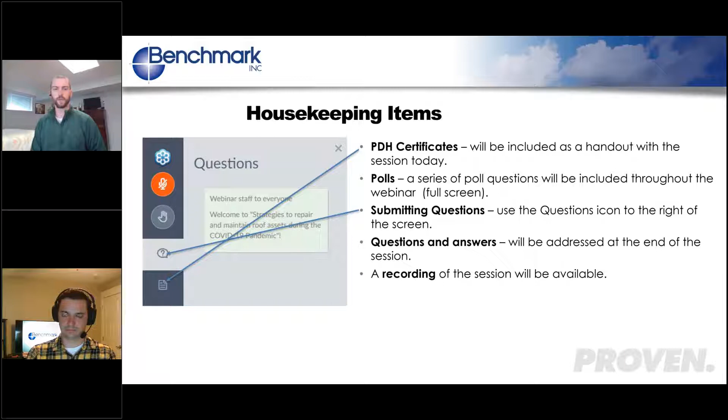First, I want to introduce my partner in this presentation today. Andrew Reynolds is a partner with Benchmark. He's been in the roofing industry for 10 years. He is a senior consultant and a licensed engineer from Iowa State, Go Cyclones. His contact information is available on the screen if you have any questions for him after this presentation.

My name is Ben Fiedler. I'm a staff consultant with Benchmark. I've been here for 5 years, and I am a registered roof observer. Once again, there is my contact information.

A little bit about Benchmark real quick. We are a roof and pavement design company. We are independent, privately owned. We have no special interest with manufacturers or contractors. We really want to look out for our clients' best interests. We have two offices, one in Cedar Rapids, Iowa, and the other in Waukesha, Wisconsin, as well as consultants based throughout the United States out of their home offices.

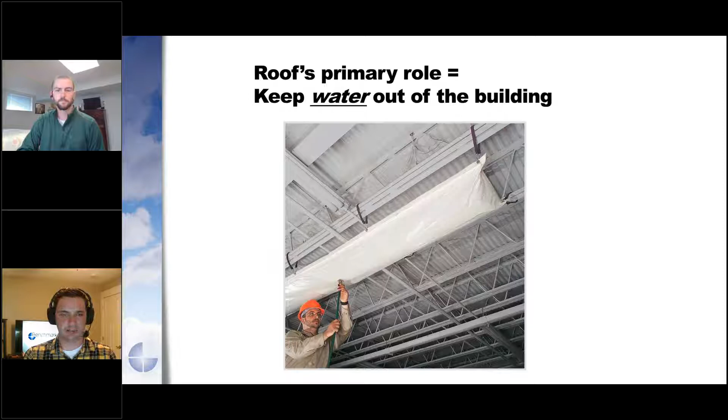Yeah, so inherently, the role of a roof is pretty simple: try to keep water out of the building. While it's somewhat simple to put on a roof that's watertight, it can be difficult to make that roof sustainable and long-lasting. There are a lot of different variables we're going to talk about today that you have to think about when looking at either putting on a roof for new construction or re-roofing.

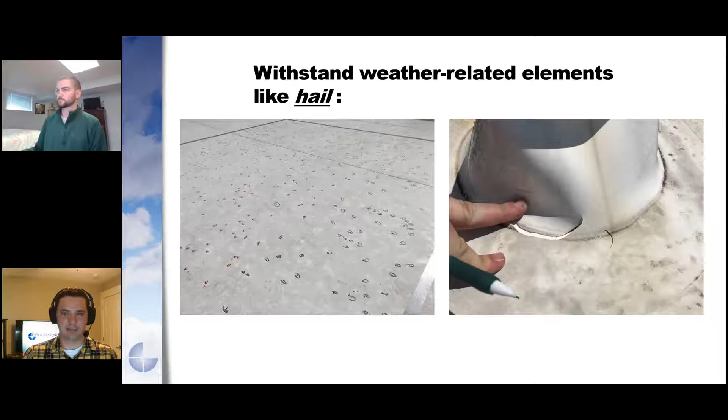One of those weather-related elements is hail. Hail is a big topic right now in our industry. It's kind of an ever-moving target on how to design for it and what materials to use and when to use them. So it's a moving target, but we think we're getting there with it.

Another one that's very project-specific is wind. You really need to know your situation with this. There's a ton of different variables that compound on each other to come up with a proper wind design and wind uplift pressures. I'm going to go into this in a lot more detail later, but the important thing is you really need to have a design professional do these uplift calculations, even section by section, because scenarios change even if roofs are right next to each other.

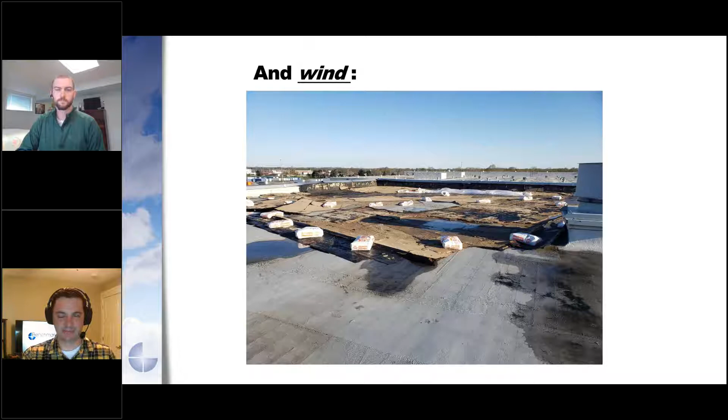And there was a small fire that started in one side of the plant. It got up into the roof. It was all applied in asphalt. Pretty much there's tons and tons of liquid asphalt coming into the building, caught everything on fire. It was a total loss.

This changed a lot of things in the construction industry, including firewalls. And it also triggered things like no more roofs being installed with asphalt directly to decking. So it was a big event, about 1.5 million square foot loss, sparked a lot of things in insurance for insurance requirements as well. So it's definitely something that we look at every single project we do.

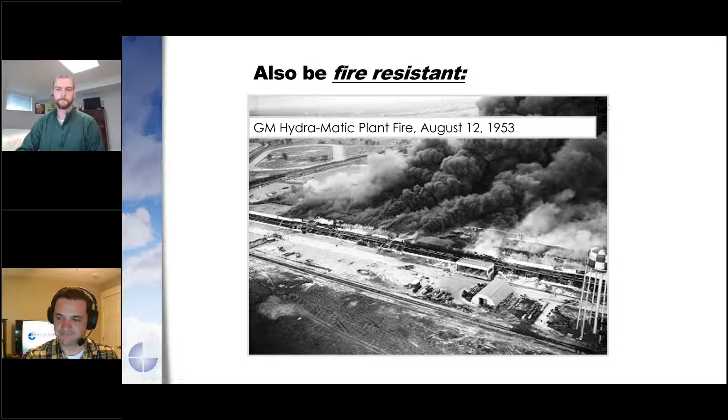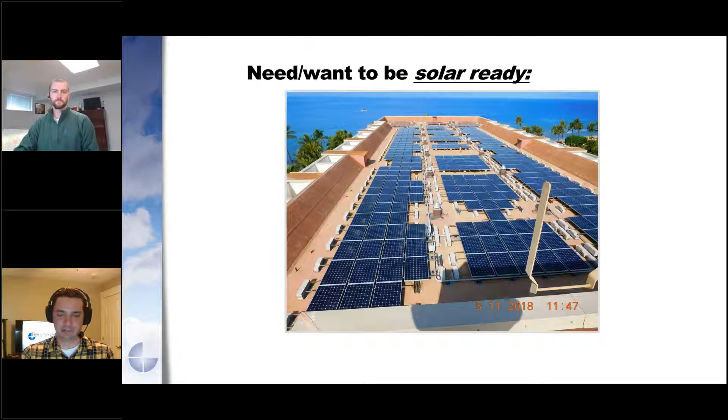You're going to have an electrical engineer. You're going to have a structural engineer, and you're going to have those parties talking early.

And the need or want to be green roof ready. I'm going to touch on this later, so I'm not going to spend a lot of time on it now. So I'm going to kick it over to Ben, and he's going to talk about the roof design process.

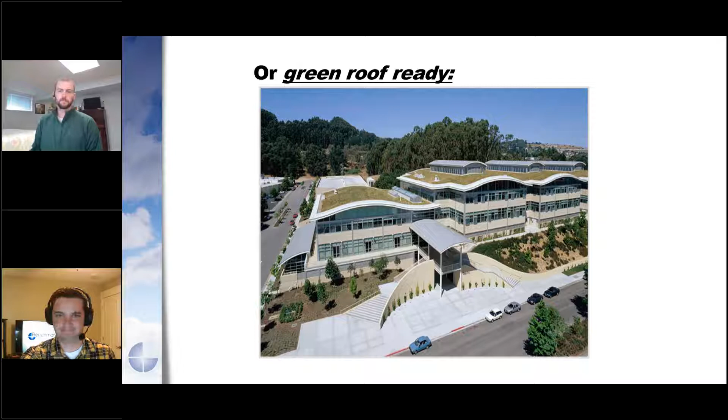The first thing we want to touch on is trade associations, so that would be NRCA, ERA, Asphalt Roofing. All these trade organizations try to develop standards that help guide best practices in the industry. For example, SPRI has developed a lot of really high level edge metal standards as well as gutter standards.

The next thing we want to think about is insurance requirements. So many facilities are Factory Mutual or other large carriers, and they have a lot of their own requirements, and they set a lot of standards as well.

The next thing we need to think about is your local municipal government level restrictions and standards, such as Miami-Dade in the Florida area. They have a lot of hurricanes in that area, and so they have a lot of standards that help reduce the risk during hurricanes. And the last thing we want to think about is building codes.

And building codes actually often adopt insurance company and trade association standards and codify them. So for example, SPRI's ES-1 edge metal calculation is codified, as well as a lot of Underwriters Laboratories standards.

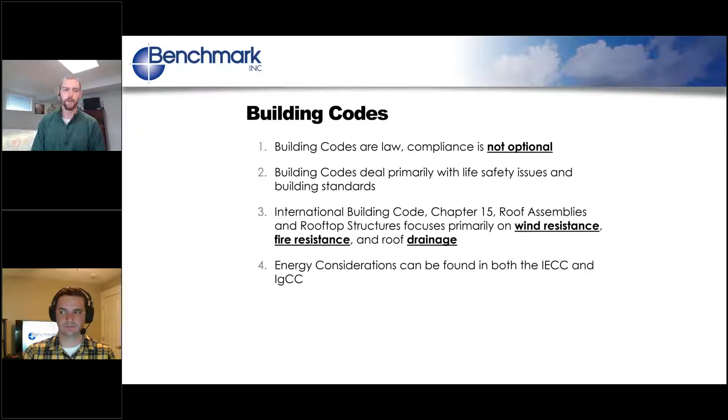Energy efficiency in a building is impacted by the International Building Code, the Energy Conservation Code, and the Green Construction Code. Depending on which one of those is adopted, you have to check different places to see what your insulation requirements are. With that, we're going to switch over and start talking about wind uplift.

Within the code, you won't actually find anything on how to calculate wind uplift. It references you to a publication called ASCE 7. There are different versions - 705, 710, 716 - those are just release dates that different codes reference. For instance, the 2018 code references ASCE 716.

On top of that, you also get internal pressures. If you have overhead doors, windows, or regular access doors, when wind hits those there's some leakage. So on a strong wind event, if you have a loading dock with a large overhead door, you'll get air leakage, or if that door's open, air gets inside and pushes up on the roof deck. It compounds - you've got wind on top sucking the roof off, and wind inside pushing up. That's usually when we see failures.

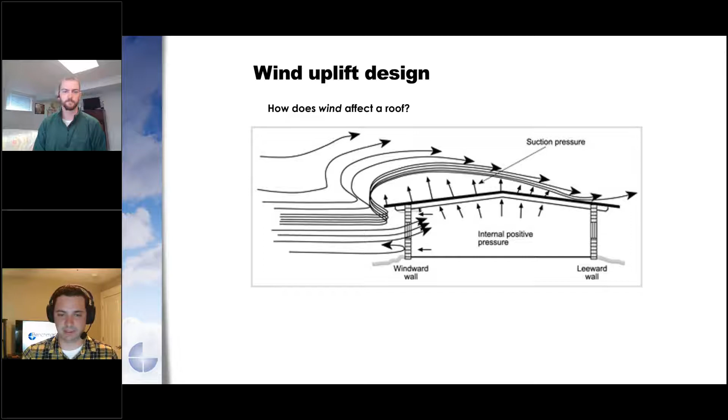You determine your uplift loads per ASCE 7, and we'll also touch on FM Global more - their name's going to pop up quite a bit through this presentation. They have their own calculator based off of ASCE 7, but there are subtle nuances that usually result in higher uplift pressures when you use FM Global's calculator.

Some things you'll need: building height and width - on older codes, those are used to determine your perimeter and corner zones. Design wind speed, which varies depending on where your project's located. Parapet height - if you have a parapet above 3 feet tall, you can actually get some breaks when designing your wind uplift, especially in perimeters and corners.

Ground roughness touches on whether you're in an open field compared to a downtown area - there's a variable that changes, so you get a break if you have surrounding buildings that can block some wind. Occupancy category is a very important one - it's pretty much what's in your building. Is it a warehouse for finished goods, a hospital, or a warehouse over some sort of fuel storage?

Depending on what your building uses, it's going to change the requirements for your wind uplift. Roof slope will change things too, if you get high enough slopes it can change your perimeter and corner zones. Then there's enclosure classification, that's if your building is closed, partially enclosed, or open, and there's some calculations to do for that. Pretty much, if you have a building with a lot of openings on one side, the thinking is wind can get into those openings with no way out, so it goes up.

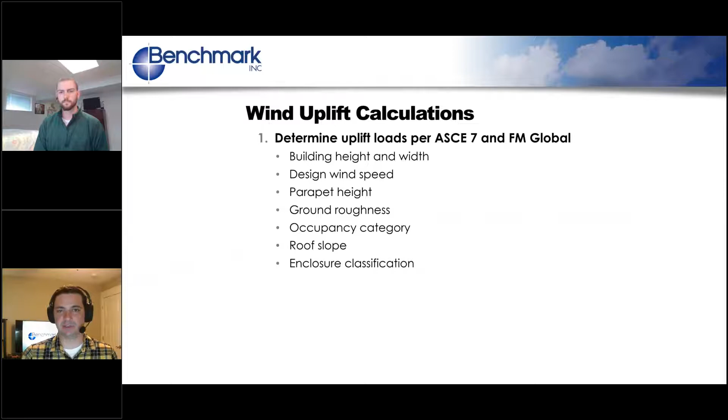So once you do all your wind uplift tests for each roof section, it's important to do it for each one because it will change as you go across, even on the same site, or if you have two roofs next to each other, they can change drastically. You need to pick a roof section or roof system that meets that.

So your research options are FM's Roof Nav, that's the big one, I'll touch on this a little bit later, but there's close to 1 million tested roof assemblies within Roof Nav's database. Miami-Dade uses some private testing laboratories and then reviews and accepts those roof systems. UL does a lot of testing with fire. The ICC has evaluation reports available for tested roof systems.

And then the newest one is SPRI's database for assemblies called DORA. That's slowly picking up, it's a free site to use. Manufacturers can submit their testing, DORA accepts it and puts it in their database. It's a really easy database to use. RoofNav can get a little tricky, so if you're having troubles, I'd recommend trying DORA.

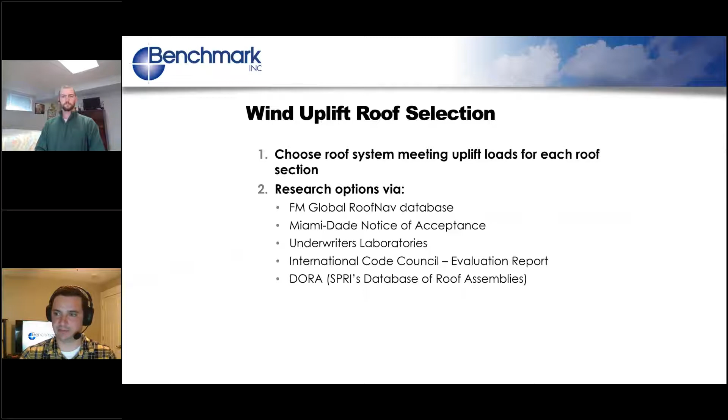So like I said earlier, you're usually going to see your losses happen at your perimeter and corner zones. The first line of defense on this is your nailer attachment and edge metal attachment. If you don't have those two kind of buttoned down, and you have a large wind event, you're more susceptible to having a loss.

For a nailer attachment, there's really not a whole lot in the code for that, so I'd recommend FM Global data sheet 1-49, which goes over nailer attachment for all sorts of different scenarios. You also want to make sure you have an edge metal system or coping cap designed to ANSI SPRI ES1 standards. That's in the code, that's a requirement. There are a lot of different ways to do that, you can have shop fabricated sheet metal tested to ES1, or pre-manufactured sheet metal systems from manufacturers that do their own testing and manufacturing. But it's really important to have a tested ES1 assembly.

There's also a gutter standard called GT1. It's not in the code yet, it's going in for adoption on the 2021 building code I believe, so that's going to become a new requirement. That's going to be interesting because there are some really, really bad gutter details that get installed, so it'll be interesting to see how that changes in the coming years.

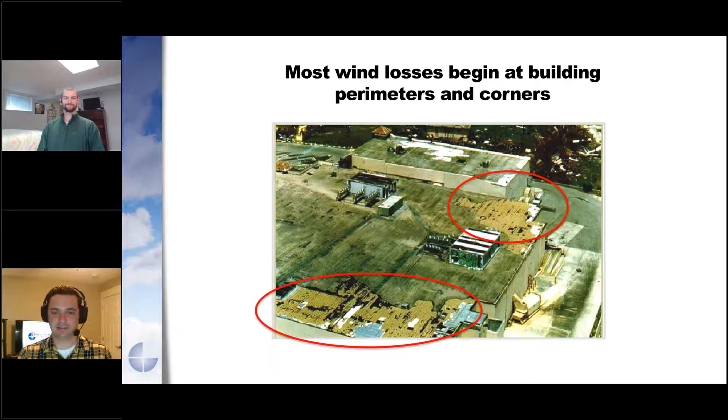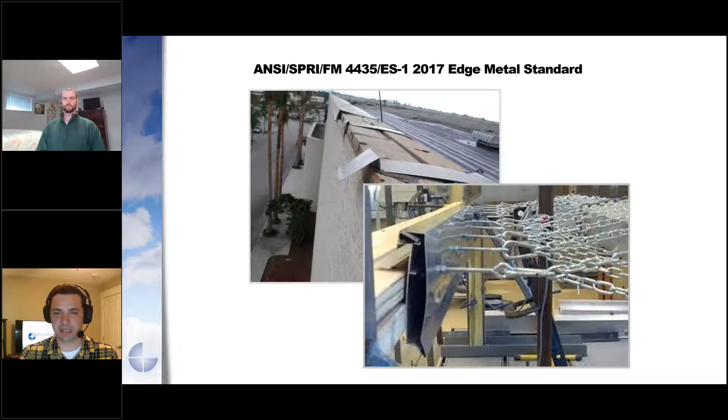Slope and drainage, I'm going to base this pretty much on the 2018 building code. For new construction, you're required to have a 1/4 inch per foot slope, whether that's structural or within a tapered system. Either one is fine, perfectly acceptable.

And then for each drain or scupper, you need to have an overflow device. So if you have a drain, if it's by a perimeter you can use a scupper, or you can use just a standard overflow drain. And then if you have a drainage scupper, you have to have an overflow scupper next to it.

For re-roofing, if you have a roof replacement or a recover of a low slope roof, you don't have to meet that 1/4 inch per foot standard, and you don't have to have overflow devices installed. You don't have to upgrade to meet code. So when you're talking about drainage, what you want to know is how does it slope, is it tapered or structural?

Can you improve drainage? If you're doing a recover and it's a tapered system, is there a way to install additional tapered insulation to take care of any problem areas? Is there enough drainage? If you notice your roof holds quite a bit of water during rain events, is there a way to add additional drains or scuppers? It can be expensive, but sometimes it's necessary, and it becomes a life safety issue, especially if you're holding a lot of water on your roof. You're more susceptible to collapses.

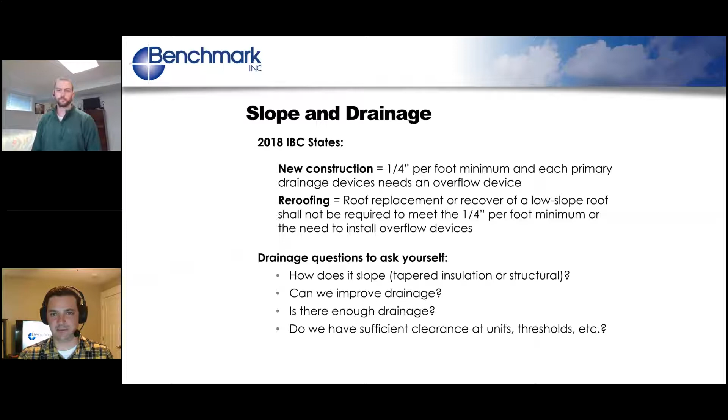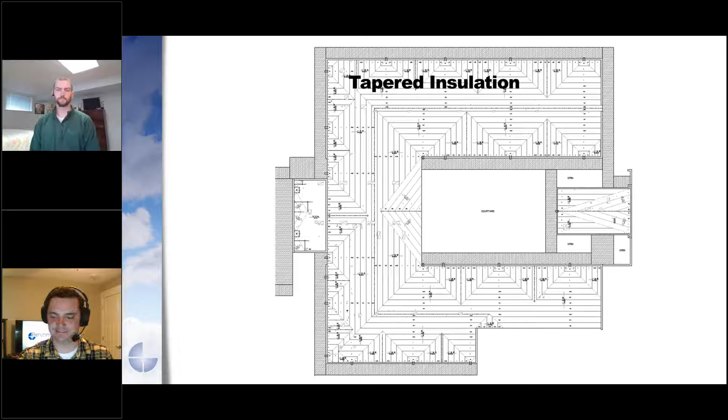So, environmental regulations. Once you've taken care of building code requirements, wind uplift, drainage, and stuff like that, you need to think about where your project is specifically located. The two big environmental regulations we run into right now are the South Coast Air Quality Management District, which focuses around the Los Angeles area with a few counties wrapped within that, and the Ozone Transport Commission, which covers the Northeast United States—think of the original 13 colonies. Those two districts restrict, to a certain extent, VOC content in roofing adhesives, primers, sealants, and a few other products.

So say your standard bonding adhesive for EPDM might have a VOC content of 500 grams per liter. They restrict it down to like 250 grams per liter, and I think South Coast might restrict it even further. So it really pushes you to change materials, especially adhesives. You're probably going to have to move to a water-based adhesive, which restricts your installation time because you obviously can't have it out when it's freezing. With solvent-based, you can actually get some variances to install in freezing temperatures.

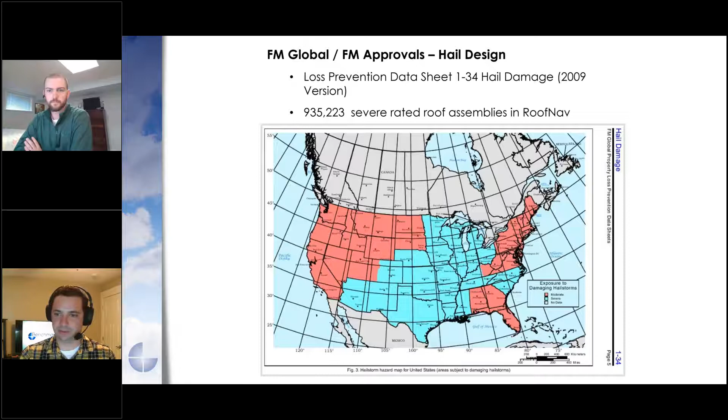As of yesterday, out of the 950-some thousand, 935,000 of those were rated for severe hail. So it was really easy to find roof assemblies within RoofNav. 98% of them were severe hail. So it really wasn't a huge issue until 2018.

Gave the guys up there a little break. But as of yesterday, there's only just over 4,100 very severe rated assemblies within RoofNav, which is just over 0.4%. So it's put quite the cramp.

If you're FM insured or you follow their policies within that centralized area, it is really difficult to find a roof assembly that is really acceptable. There are quite a few modified bitumen assemblies over a gypsum cover board, which is a pretty standard roof system and one that we specify quite often.

But if you want any sort of single ply roof system right now, almost all of them - I can't say for sure all of them - but PVC, TPO, EPDM, they do have assemblies available, but they use plywood or OSB as a cover board, which we do not recommend doing. If anyone's ever seen a slightly damp piece of plywood get baked out in the sun, it curls up like crazy. So we're not 100% sold on using those systems. It is driving a little bit of innovation in the industry, a little bit of change, but it is a difficulty right now.

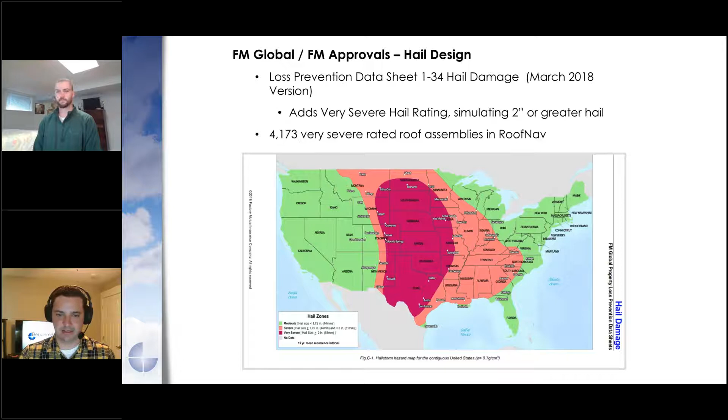All right, the next thing we're going to talk about is the occupancy considerations of your buildings. Recently we had a hailstorm that came through Cedar Rapids, and my sun porch roof ended up getting destroyed and needed to be replaced. So I had the roofing contractor install an adhered EPDM roof system. And for the first time, I knew what it was like to be in a building trying to work with a re-roofing project going on overhead. And the odor from the adhesive just completely filled my house.

Thankfully, we were able to open the windows and spend a little time outside to get away from the odor. You really need to be thinking about this, if you have office space directly below your roof section, a solvent-based adhesive is probably going to cause odor issues with the occupants. There are some things you can do to work around that, such as using water-based adhesives, which have a lower odor, or changing how your HVAC system vents.

The next thing you need to think about is the temperature of the interior space. Many food production facilities have blast freezers that reach minus 40 degrees, and they'll have a much different design than, let's say, an open canopy.

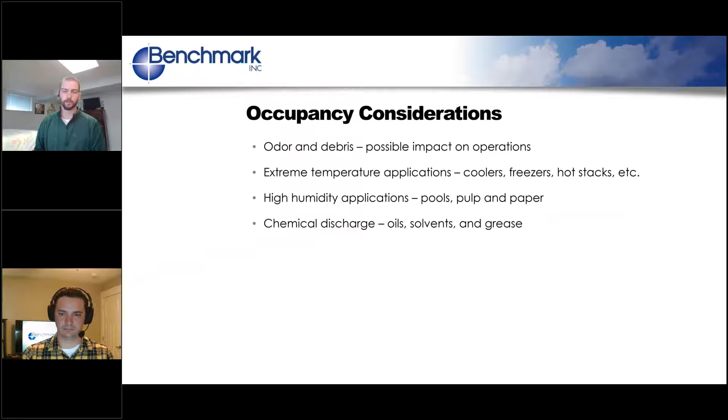So let's dive in a little deeper on odor avoidance. Asphalt is definitely on its way out as an adhesive. However, comparing asphalt to polyurethane adhesive, you definitely want to go with the polyurethane, because it has a significantly lower odor. We were talking earlier about VOC content, and one of the biggest misconceptions is that low VOC adhesives smell less. Actually, more often than not, they have a stronger odor than a full solvent, VOC-containing adhesive. So just be careful of using that as a control system.

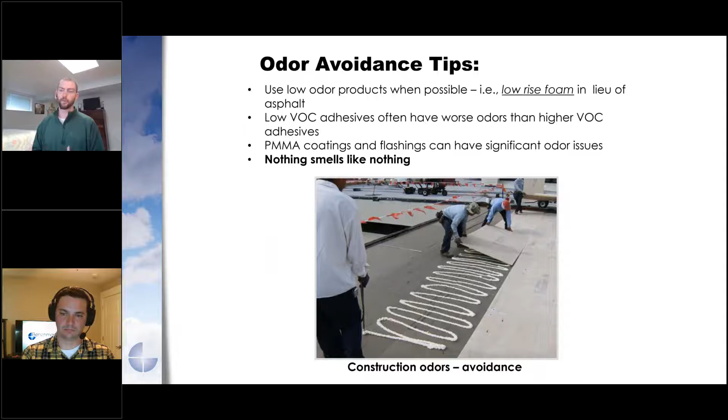PMMA coatings have some of the strongest odors in the roofing industry. Really just think about the fact that nothing really smells like nothing - every adhesive on the market has an odor to it. If you install a mechanically attached roof system, while you won't be adhering most of your field membrane, there will still be adhesives needed on flashings and things like that.

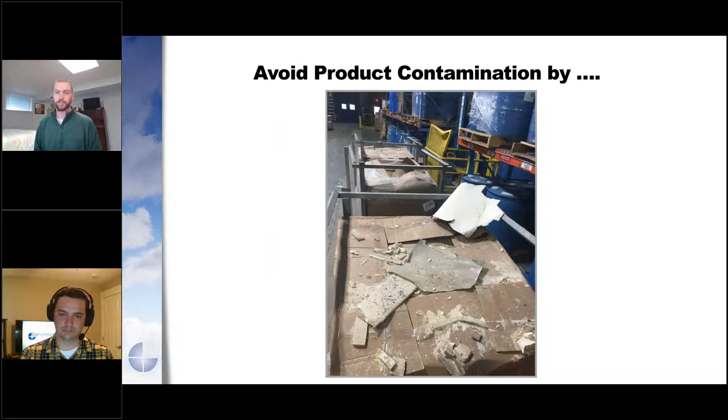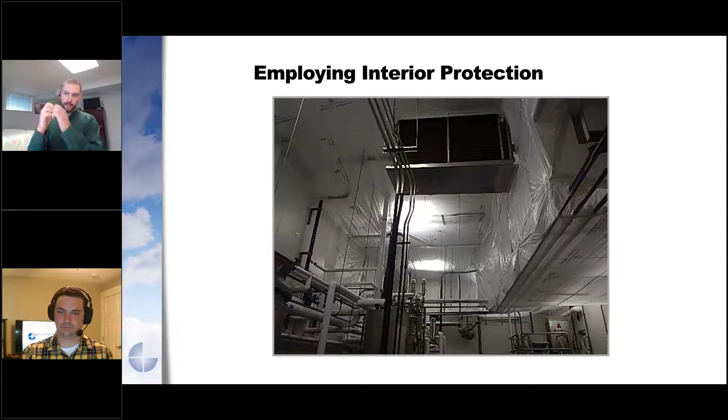As a consultant, this photo right here makes me really uncomfortable. I never want to have to see that at a client's site. That's debris coming in from a re-roofing project, and the easiest way to avoid that is by installing interior protection. It's a plastic sheeting material, and there are specialty contractors that install that. Right now, there are actually two contractors that have a material designed to be installed below your fire sprinkler system, which is a big deal because normally a fire marshal would not approve of that system. However, they have a seam in it that, once exposed to heat, automatically breaks away so that the fire sprinklers can still work.

So talking a little bit about the temperature and humidity situations - one of my mentors, when I started in the roof design process, told me there are three things I really need to be careful of: infiltration, condensation, and saturation. Infiltration is when warm, humid air is able to get into the building from the outside. That's your biggest issue in a freezer environment, because that humid air is going to condensate and freeze and create some very large icicles. So when you're re-roofing a freezer, you really have to focus on making sure you have really tight air seals and vapor seals on your perimeters and penetrations.

Condensation is when that warm, humid air comes into contact with something cold and turns into liquid. So if you're in a high humidity environment, you want to install a vapor retarder so that warm, humid air cannot condensate inside your roof system, which will prevent humidity issues. Saturation is when there's just so much moisture in the air that it has to come out some way - that's usually a sign of food processing facilities during washdown, not something impacted by the roof system.

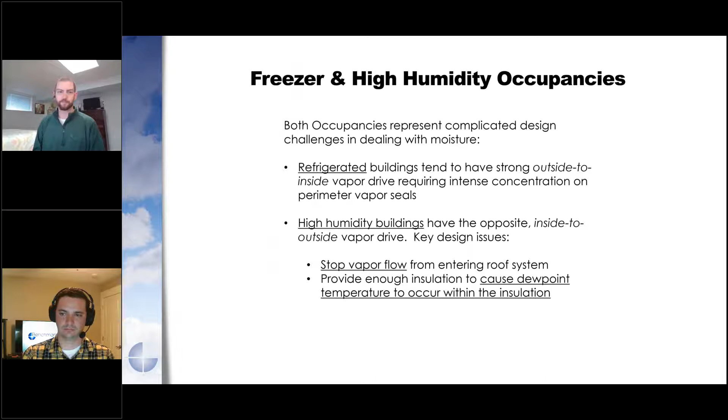So we have another poll question. Does your facility have high-risk areas for vapor? You can check all that apply - check if you have high humidity, check if you have low temperatures, or if you're in an environment that has neither, feel free to check that.

So on these projects, Andrew, that you have either high humidity or extreme temperatures, do you find it fun working through those design processes? I enjoy them. Not everyone does, but yeah, it's fun. You get to bust out the psychrometer and do some dew point calculations and stuff like that.

One thing Andrew just mentioned is a psychrometer. A thermometer takes temperature readings, a psychrometer takes relative humidity readings. You have to use that to establish where the dew point of your roof system is based on the humidity levels inside the building.

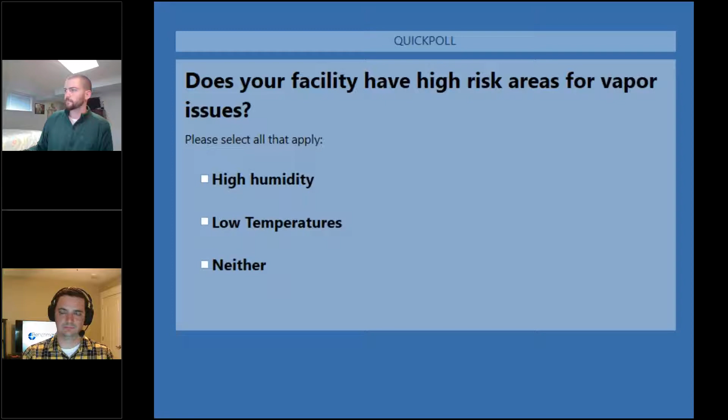Looks like our voting is slowing down, so we'll give a couple seconds more for any last votes to come in, and then we will share the results. All right, the results are: 51% of attendees have high humidity environments, 23% have low temperature environments, and 51% have neither.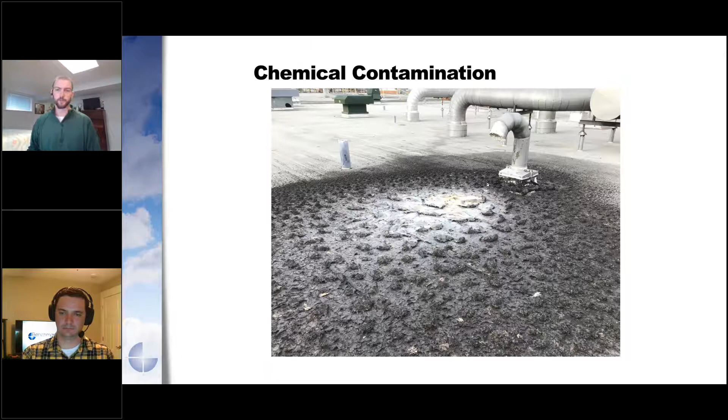You want to think about whether it's possible to install a containment system so that grease is captured before it hits the roof. If you're unable to control it, you just need to install a membrane that will be resistant to your chemicals. If you do, you need to contact different manufacturers with your specific contaminant. Different materials have different resistance, so you want to make sure you find one that works with your particular contamination.

Going into energy considerations, this kind of goes back into the building code requirements again. A few things to talk about: insulation requirements for code compliance, the cool roof—is it required or is it actually a benefit or not—and then air barriers, which I'm going to finish touching on this slide.

Air barriers have been a requirement in the IECC since 2012. They're not required in climate zone 2B—not quite sure why they got out of it—but they're not required in roof recovers or replacements as long as you're not altering the walls. If you're doing a complete building renovation where you're stripping down, say taking face brick off and putting back metal panels, you're actually required to install a continuous air barrier at that point. But if you're just doing a simple roof replacement or recover, those aren't required.

Typically an adhered membrane system—PVC, modified bitumen, TPO, whatever it might be—if it's adhered, those are typically accepted as air barriers. You still have to, if it's new construction or a large renovation, tie that into the wall air barrier. But if you have a ballasted, induction welded, or mechanically attached roof membrane, you're going to have to put an additional air barrier within that roof system. Probably the most popular way is to put a polyethylene sheet or a self-adhering sheet directly onto the deck, then run that up your walls and tie it in, or run it under your parapet walls if it's new construction. There are a few different ways to do it—it's really project specific.

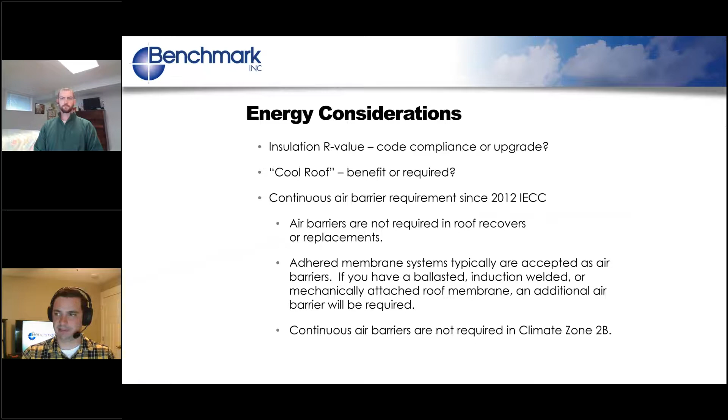One nice thing in the code: say you have a project around Kansas City, but you're not sure if you're in zone 4 or 5. The code lists out all the states with different counties, so as long as you know what state and county you're in, you can look it up, and it tells you what climate zone you're in.

You do need to really know what code you're using and if there are any amendments. For example, I'm doing a project right now in Illinois, and they used to have their own energy conservation code. They actually just adopted the 2018 IECC, but there are amendments that read if you have flashing height restrictions, or skylights you can't raise, or door thresholds you can't move, they let you reduce your insulation down to a minimum of R20, which is a huge savings on insulation costs, and also a huge savings on flashing height when you go to detail work. So knowing your code is really important.

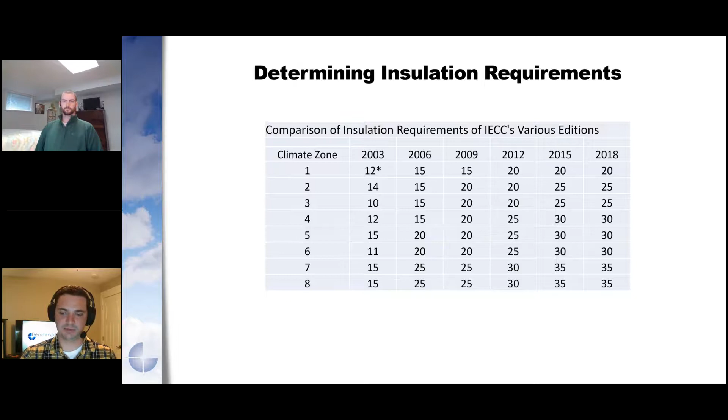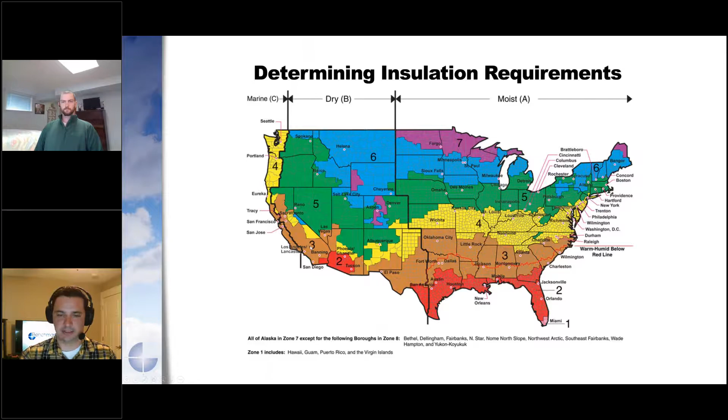Cool roofs, right now, are required. If I go back to this map, climate zones 1 through 3, you're gonna have to use a cool roof, which a lot of people automatically think means single ply, white TPO or PVC, but there are a lot of different options. You can use a modified bitumen. It's all based on a reflectivity rating.

Besides that, California requires it throughout the state. Chicago requires them, and Houston requires them. Those cities are pushing them to try to battle heat island mitigation, because it's just all city streets and buildings blocked up. So they're trying to throw some white down wherever they can to mitigate all that heat being attracted to their cities.

As for energy savings, a lot of people think if I put a cool roof on, I'm automatically gonna save a bunch of energy because I don't have to cool my building as much. That does make sense, and that's kind of why it's required in zones 1 through 3. But as you move north, into areas like South Dakota or North Dakota, where you're not cooling your building as many days as you're heating it, you start to lose those savings a little bit. So it probably takes a little research on a project-specific basis to know whether or not it makes sense to put on your roof.

Green roofs are something I thought was gonna maybe take off once I got into the industry, and I'd start seeing them more and more, but they really haven't. The really simple reason is because they're really expensive and really difficult to design, install, and maintain.

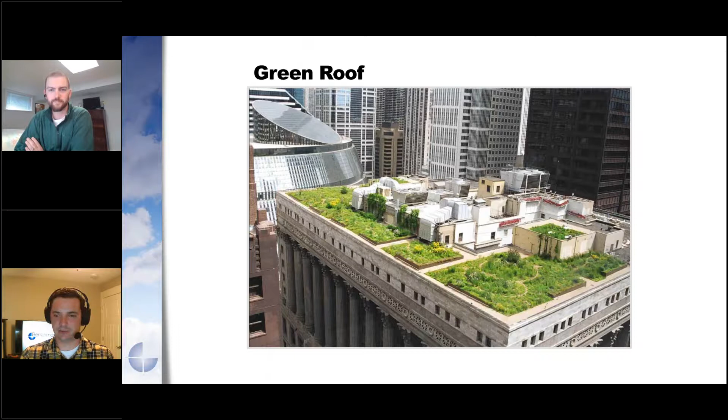So talking about existing buildings and some things you need to do to get yourself going. Core samples are wildly important, along with walking the interior of the building.

Core samples give you your thickness that lets you figure out how that existing roof is sloped, if it's structural, is it tapered. You get that full thickness of the roof. You need that, especially when you go back to start detailing, to figure out how much flashing height you're going to be working with. And then identifying the roof deck type and condition. That's huge to do a deck inspection before you do any sort of roof design on an existing building. If you do find bad deck, it can lead you to finding problem areas on the roof, difficult things to design. It just tells you a lot before you get going on the design work.

You might need to determine any need for asbestos testing. There are still roofs that have asbestos materials on them. You find that in corrugated and flat panels that have asbestos containing materials. Then you find them in felts, underlayments, asphalt and coal tar pitch. Some sealants have it, and then some mastics too. Every state does testing differently. There's not really a standard for the country, so everything's a little different on how you have to take samples and send those in. So just get with an asbestos professional for that.

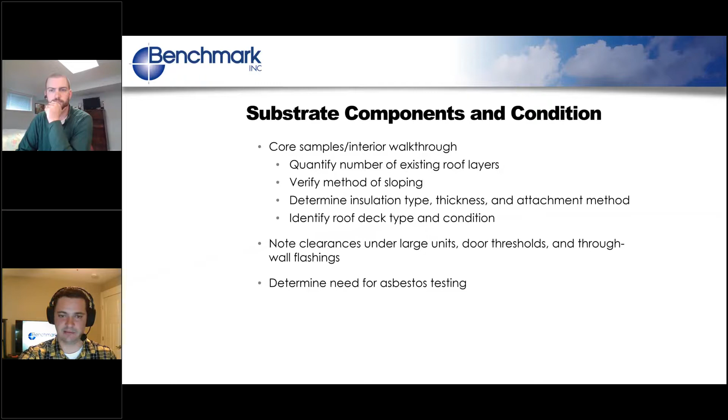This is a core sample on a tapered roof. As you can see, it shows you how many layers. It shows you the cover board. It gives you an idea of how that existing membrane is still working - is it working, is it failing? So core cuts tell you a lot.

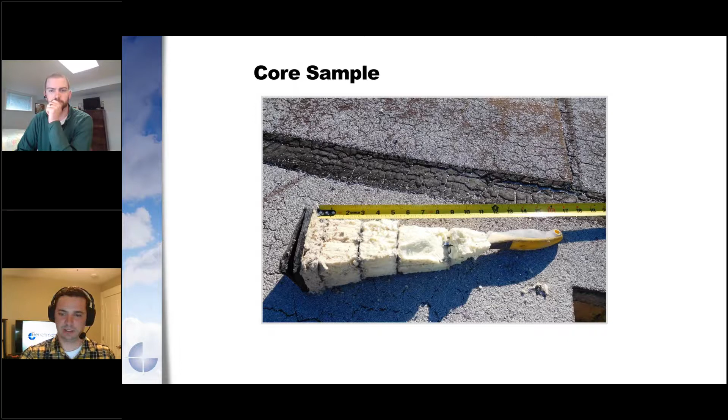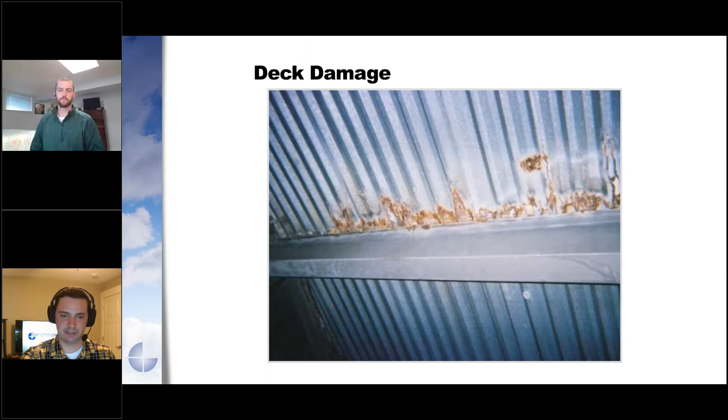Then some additional tests, if you're doing a recover of any sort, or just a straight recover - if you want to put new insulation on your existing roof, you need to do an infrared scan to get any wet materials out of that roof first. A fastener pullout test is pretty common if you have kind of an odd deck, like an aluminum deck, because most fastener pullout data that membrane or manufacturers provide is usually for a steel deck, not aluminum. So if you have an aluminum deck, you'll want to do pull tests, along with if you have a lightweight concrete deck or a gypsum deck and you want to fasten to it, you'll probably have to do fastener pull tests to figure out what that specific fastener is going to give you.

Then a bonded pull test is used if you want to adhere to an existing roof. You'll have to do a bonded pull test or a bubble test. You can also use this if you have an irregular surface that you want to put like a self-adhering vapor retarder on - you can do a pull test for that vapor retarder as well.

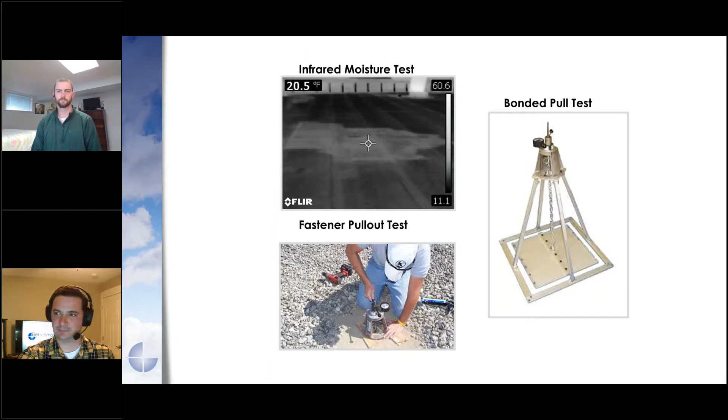All right, the next thing we're going to talk about is roof traffic, and we're not talking about driving on your roof. What we're specifically talking about is, do you have other trades that are walking on your roof? Do you have HVAC contractors, plumbers? You see that really quite a lot on heavy industrial sites where you have a lot of equipment up there. Do you have a high-rise building where window washers need access? If you answered yes to either of those, you're going to want to install possibly some additional walkway systems - raised platforms, walkway pads. And do you want to install solar?

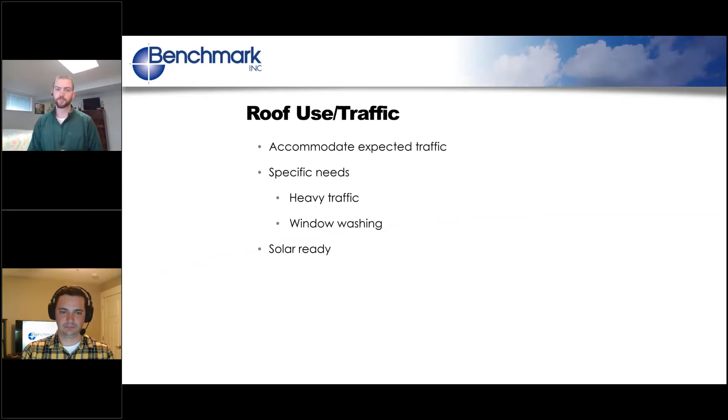If you're installing solar, there's a lot of things you need to think through in the design process. The biggest thing is you want to make sure that you design a roof system that has a life expectancy matching the length of time you expect those solar panels to be installed. You don't want to have a solar panel that's designed for 30 years and then your roof only lasts 25. Because if you have to uninstall that solar equipment, you're probably going to lose a lot of the financial advantages of having that solar system installed in the first place.

You'll want to assess the building structure for that additional dead load, like Andrew talked about. You'll need to have structural engineers involved. If you're having the solar panels themselves rest directly on the roof surface, you'll need to make sure that, yet again, it's designed for that extra traffic. And then before you install it, you want to make sure the roof area is nice and clean, that way you don't accidentally cause punctures underneath where the support stands are.

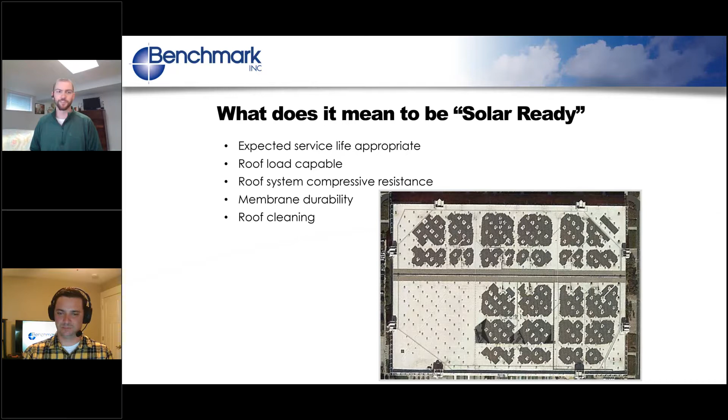The last thing we want to talk about today is sustainable roof design. We're seeing this more and more as an important factor for companies. The first step to having a sustainable roof actually doesn't begin in the design process, it starts in the proactive management of your roof assets, because the longer you can keep your roof in serviceable condition, the less debris ends up in the landfill.

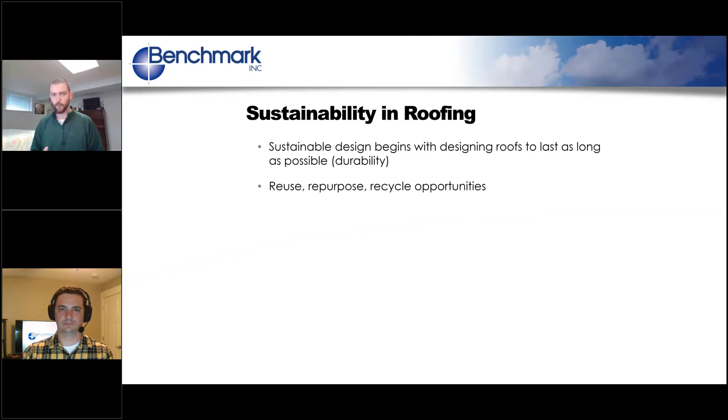That's the easiest way to impact sustainability. There are a lot of things you can do during the roof replacement process. There's a theoretical zero landfill project where you'd be able to recycle your membrane and insulation, and have your materials delivered without extra packaging. However, you're going to need to do a lot of legwork in the design process, talking to manufacturers and identifying recyclers, to make sure that every step of the way, having zero waste is accounted for.

In conclusion, to have a successful roof design, you must first determine the project-specific problems you need to correct, your low flashing heights, your drainage issues, that type of thing. Then compile the list of parameters, including insurance and code requirements. Then compare the different roof systems to identify which one will best fit all of your specific requirements. Once you have all that information, you'll be able to identify the best solution for your specific project.

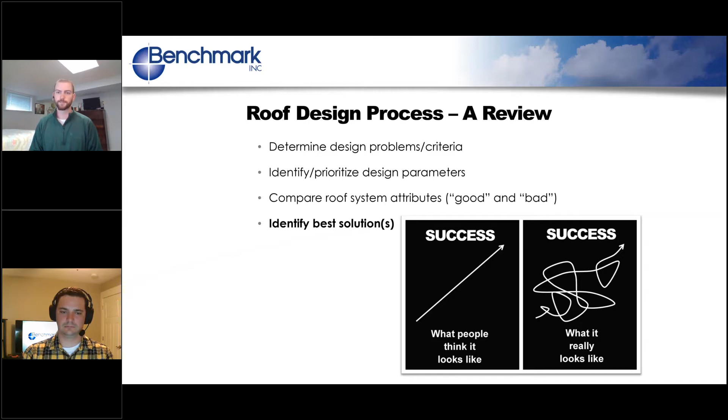The first question, Andrew: which membranes are resistant to grease and oil? It's a good question. Inherently, right off the top of your head, you think of KEE, like a true KEE sheet that's over 50% blend. KEE is a type of PVC sheet, and they have great chemical resistance. Then there's true PVC, most of those have better than most chemical resistance. Once you get into asphaltic products, they don't really handle grease that well. Same thing with EPDM, grease will just eat right through it. So definitely go with some sort of thermoplastic.